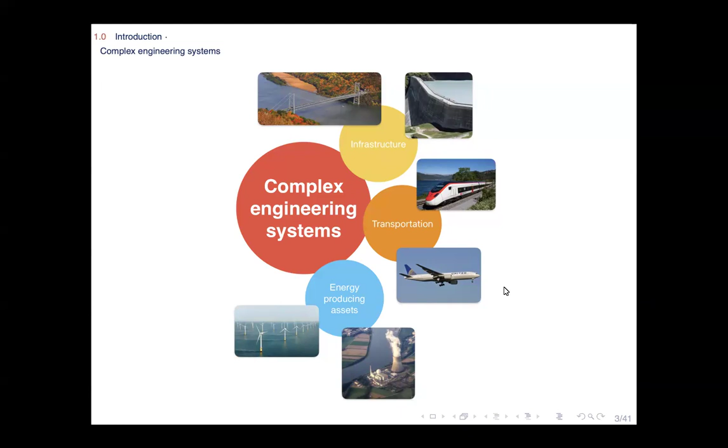The problem with all of these complex engineering systems is that once they're built, you have some sort of loads that are applied to them during operation. This can mostly be mechanical loads. And over time, these loads create degradation patterns. I'll call this degradation delta T for now, so it's a degradation rate at time T, say present time T. So we know these systems are operating and degrading, because that's just how nature is. And during this operation, we might want to monitor, for instance.

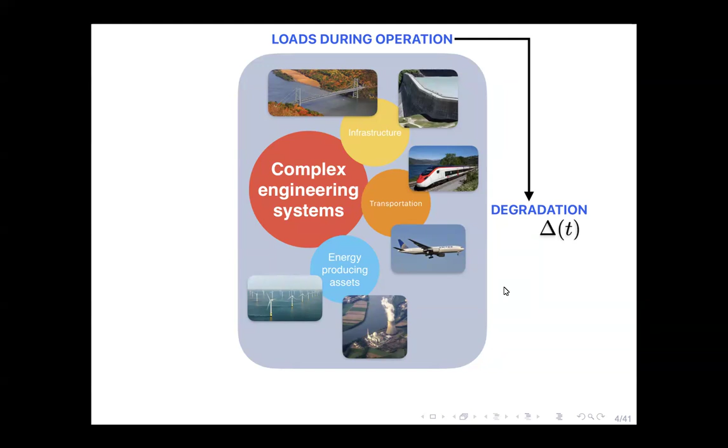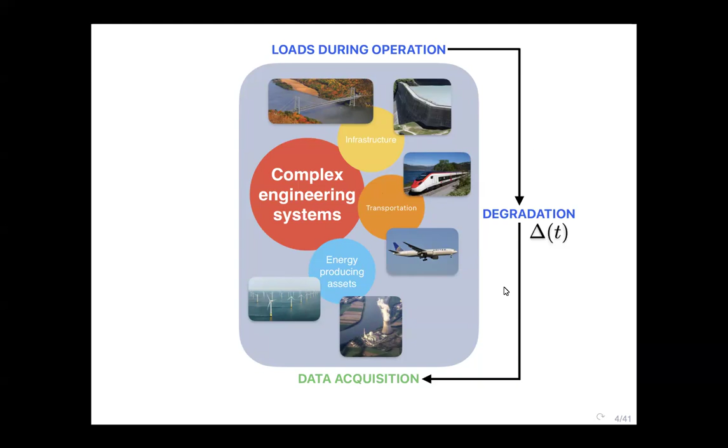For monitoring, we could acquire some data, putting some nice sensors here and there, and perhaps building data-driven models to diagnose what the degradation state is. Depending on the system, we could think about doing maintenance or actual replacement. And for maintenance or replacement planning, what we truly need is prognostics. And prognostics is where it becomes more critical when it comes to data acquisition, because we cannot really know how the degradation pattern will be on a specific system in the future.

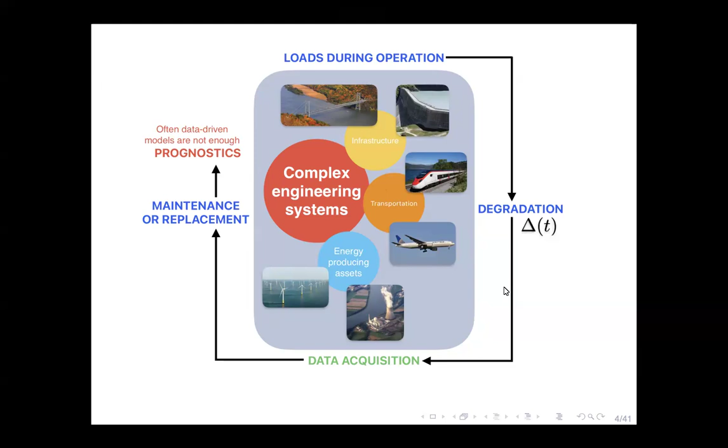So that's where often we can say, even though in some cases this is not true, that data-driven models may not be enough. And that's where we come to something new, I mean, something that's quite old in the history of science, called physical modeling. And today we can enhance the modeling of degradation by using the data. So this is the framework on which I'll build this presentation: maintenance planning, basically doing prognostics of degradation rates for complex engineering systems under loads, where we have some sort of data and some sort of physical models.

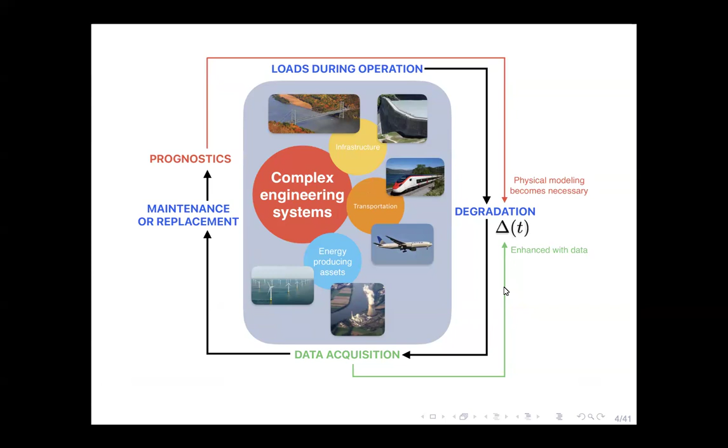Okay, and this is quite classic. We've heard about this already before. It's probably data assimilation that we've got to do. But what are the challenges that I'm going to address more specifically, because there's tons of literature on these topics? For physical modeling, I'll really be interested in the uncertainty aspect of the physical models, especially epistemic uncertainty, perhaps model form uncertainty, and the fact that it's a costly computational code.

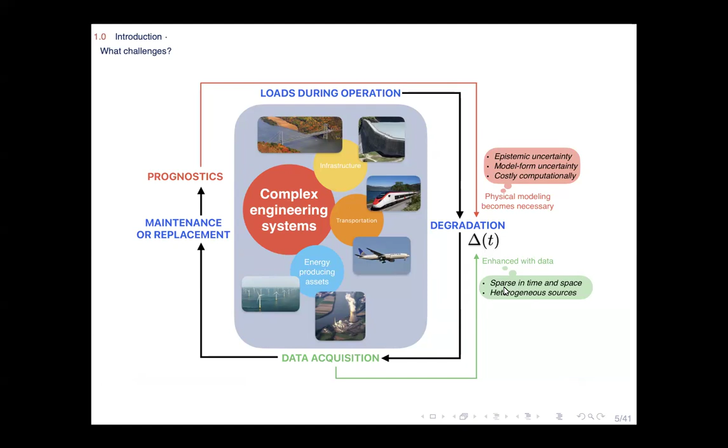And with the data, which is also in the title of the presentation, I'll talk about what we do in case the data is sparse in time and perhaps in space, and where you have heterogeneous sources. For instance, you have different operators or different sensors that give us some measure that may be related to degradation. Okay, now this was sort of an illustrative point of view.

Now to become more mathematical, when we talk about this degradation index, delta T, what we're interested in is, if this is just a scalar quantity, we want to evaluate the remaining useful life for a fixed threshold, delta star, which can be fixed depending on operation considerations, on cost considerations. It really depends on the industry, on the system.

And we want to evaluate what is basically the first time at which the degradation rate will be above that fixed threshold. And this remaining useful life is the quantity of interest in this presentation. So this is what we evaluate when we try to do prognostics.

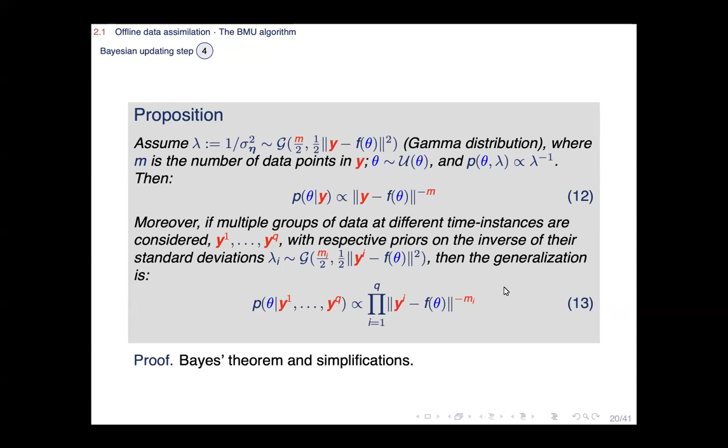At the end, our posterior will look something like this. And as I said, we just use a simple MCMC. That works pretty well because we're just working in one dimension. And we also integrate the induced uncertainty on the choice of the convex aggregation parameter. We integrate it by just sampling with a Dirichlet distribution on the simplex, and that gives us a Monte Carlo integration of the hyperparameter. And we test the convergence using Gelman-Rubin tests.

And the problem is, again, no free lunch, you've got the conditioning on the latent variables. And that's a question of perhaps how we can integrate this additional uncertainty. It's always like this in Bayesian statistics. You thought you solved a problem, you got a new one, and you sort of create new problems by solving others. That's just how mathematics works. Iteratively like this. Okay, but using some numerical tricks, we can sample efficiently in this posterior.

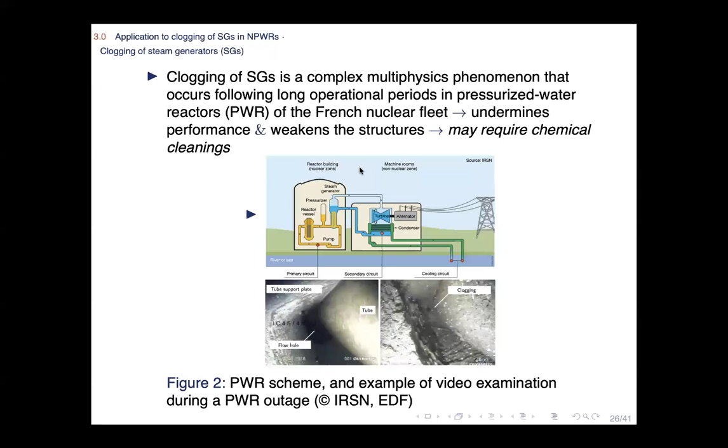Many issues. But at the same time, the problem exists, and for old reactors, we have to address this somehow. And what they do is they perform chemical cleanings. And so basically they've asked the R&D department, can you help us find a way to get better maintenance planning on chemical cleanings for clogging of steam generators than just taking the last data point and drawing a straight line with a ruler? Okay, so this is the topic.

So, okay, this is more related to my PhD. You haven't got a lot of literature, and the data is sparse both in time and in space. They're heterogeneous, and the question is how to make use of all this available knowledge, like computer code, the data, and the lack of trustworthy tools. That's why we're doing hybrid methods, and you want to do prognostics, you have to base a decision, and you also want to build a digital twin. You want to do a lot of things with a lot of tools. We can always try and build something out of this.

And so the computer code is called the tube bundle deposit code, not very important, but it's a complex multi-physics code, and that's why we didn't do intrusive surrogate modeling, because here it is a complex chaining of three codes that is very complex to handle. It also takes a lot of time to compute just for one set of input variables. And for a specific steam generator, we get the whole lifespan of the clogging rate. So the degradation here is this clogging rate tau c. We get the whole trajectory.

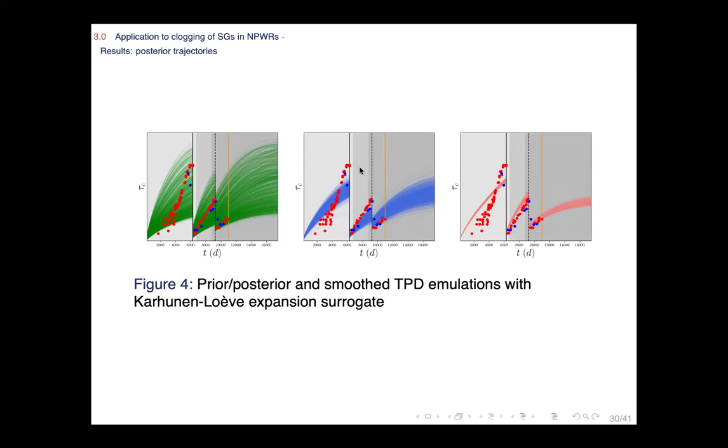And now more specifically, if we look at the trajectories, these were the prior trajectories, those were the data points we had, those are the time windows, and you can see after updating and after smoothing, we basically get a much more reduced uncertainty, that being the goal: reducing the prior uncertainty by conditioning. And you can see the prior trajectories have really been smoothed out. And this is the cherry on the cake, because you get the posterior remaining useful life distribution, which is much more informative.

Because if you looked at all that you had in the prior uncertainties and the data, already you couldn't really build... they've tried but not really succeeded in building a data-driven model that could do prognostics, because they didn't know how it would behave in the future. I mean, it's complex. But you have parametric uncertainties on the code.

But then, first of all, you do Bayesian model updating, you already shift your uninformative prior RUL, and finally, after smoothing, you really get a nice distribution. So this is a good, positive impact for maintenance planning. Okay.

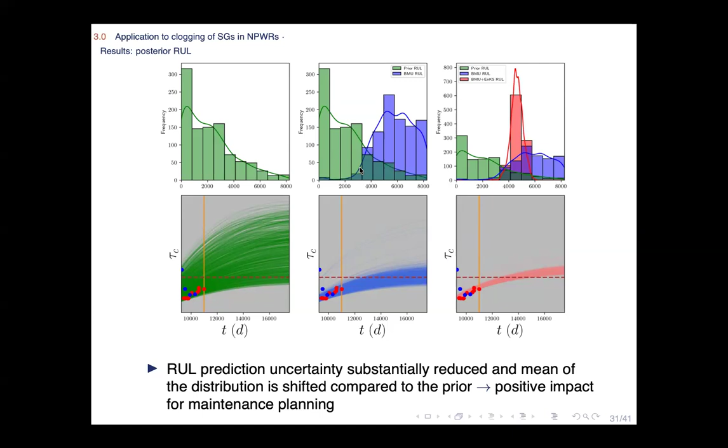So, take-home messages. Thank you for bearing with me on the maths. But the reason I started by explaining the maths is to show you that the method has the feature of being generic. You don't need much more than my third slide, I guess, where I show you what the tools look like. So you've got the computer code and the data, and then it just works. We also have a toy case on a crack propagation problem that is also in the paper.

And the goal is to reduce the parametric uncertainty of a simulation code, getting a better RUL distribution to achieve more informed decision making using the method. And we've demonstrated it on a really complex nuclear steam generator use case where we have substantially reduced the remaining useful life uncertainty. And of course, work still has to be done, because here we work with just one system, and we could see how it behaves on different systems.

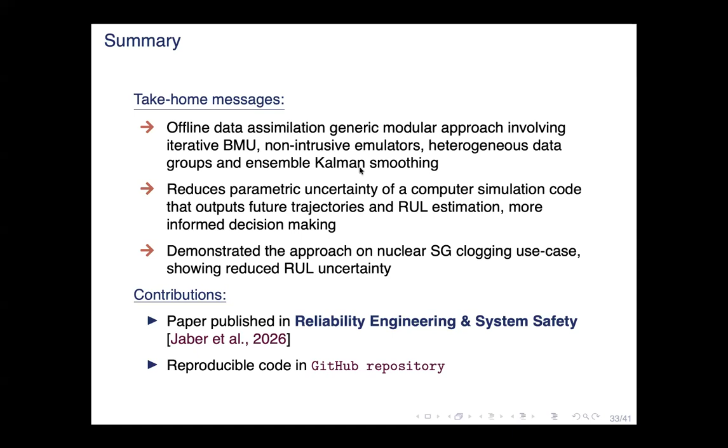If you want to read more, the paper is published in Reliability Engineering and System Safety, and there's a GitHub repo you can try if you have problems that look similar to this. Please reach out to me or try the GitHub repo. Everything is inside.

Okay, maybe just before ending I'll give a few questions on additional work, some extensions and future work. So the question is, we still have that problem on the mathematical side of integrating the uncertainty over the nominal parameters.

And just to give you a flavor of why this doesn't work with a simple Monte Carlo: if you look at one marginal with d-1 variables and try to integrate by simple sampling, then automatically one direction won't move enough in your random walk to really converge your Markov chains. So you have to find something smarter there. We're looking into variational autoencoders or stuff like that.

An additional extension to this work would be, for instance, to address the model form uncertainty I was mentioning using conformal prediction. I've worked on conformal prediction for a certain type of surrogate, Gaussian process surrogates. The important feature for using conformal is what is called adaptivity. For those who don't know, conformal prediction gives you not only a point estimate but a prediction interval.